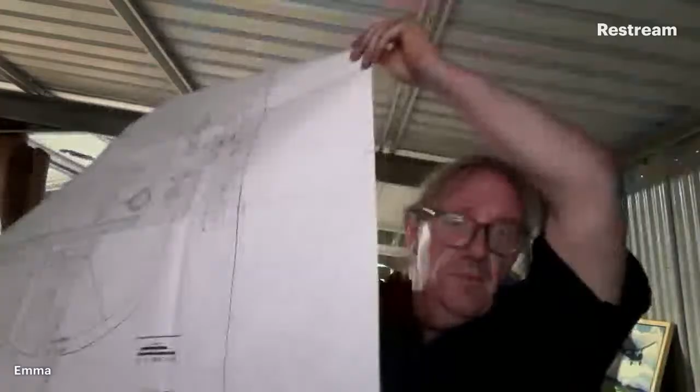Drawing number one. They're huge. I found these in the cupboard and I've been messing around with them. This is the beam engine. I don't know if it says beam engine to you guys because it could be back to front. I've been making hammer handles in the sweaty, hot, stinking temperature today, and I come home and I did a bit of wire wheel work, so that didn't help anything. So yeah, here we are. Anyway, beam engine, one of.

Can we see that? It's mirrored. How do we change? Let's have a look. Video. Video input, mirror camera. Let's unplug that and see how we go. Now we're back the other way, which is strange, it blows me away. Anyway, now it says beam engine. How cool is that?

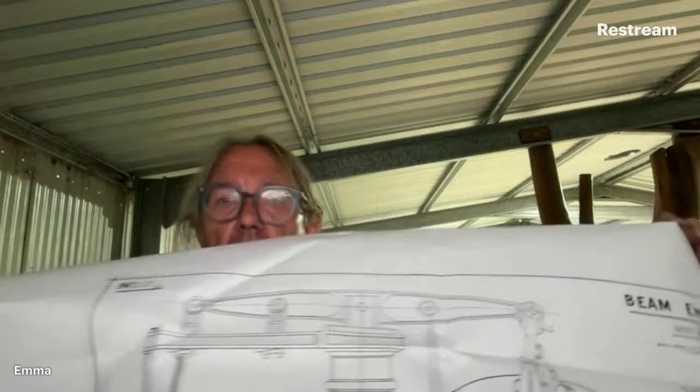Number 12 beam engine, O.B. Bolton, Sydney. O'Burnaby Bolton was an optometrist in Sydney, and he sold a lot of steam engine kits.

Some of them were - this isn't another project, just some background on this - some of them were originals and some were copies of other things, like Westbury's Kitty Hawk, and what else did he sell? Copies of quite a lot of live steam locomotives that were Australianised, I guess, and stationary steam engines that were copies.

But most of his stationary steam engines actually were originals, and I've got castings for quite a few of them. I have the majority of castings for a number 12 beam engine, which is huge, right? The box of castings must weigh 25 kilos. It's 20 inches long, that's full size, to give you some idea. It's got a 14-inch flywheel.

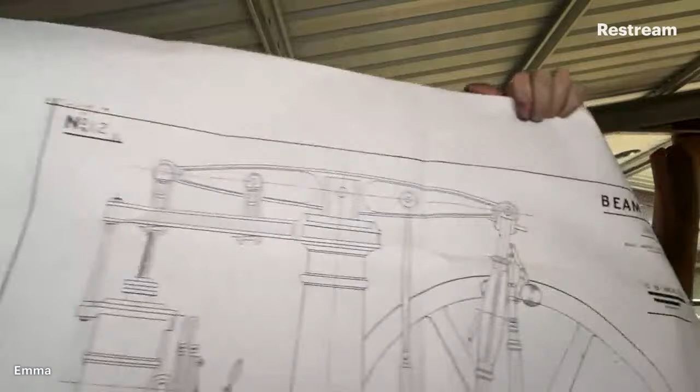So it's a bulky big steam engine, and it's nice. But being a beam engine, I thought, well, I'm going to go ahead and just CAD it up, see what we end up with, see how it looks. It's a bit of a job, there's 4 huge sheets of drawings. That's the general arrangement we're looking at, just for comparison, what have we got?

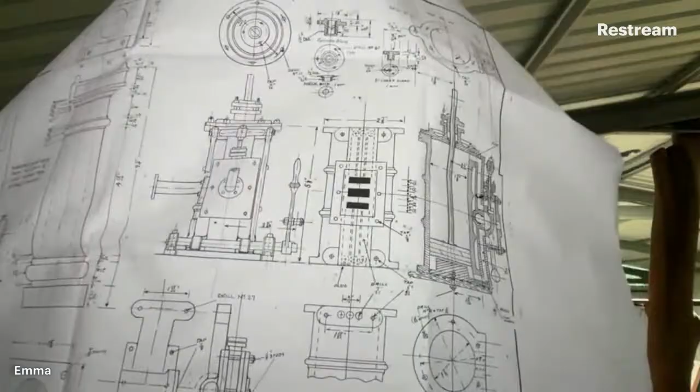Drawing number 2. Number 2's got an end view of the engine. It's got bearings, column in the middle there, and cylinder covers, all that stuff. Better just to look through the drawing from the back and show you. Cylinders, all that stuff. So that's drawing 2.

Obviously they were done over a period of time because they're all noted different and a little bit different style. But this is number 3. It's got the beam and the governor, see that? It's a governor, conrod, flywheel, pump, and valve gear. I'm going to actually fold this one up properly. It's time. There we go.

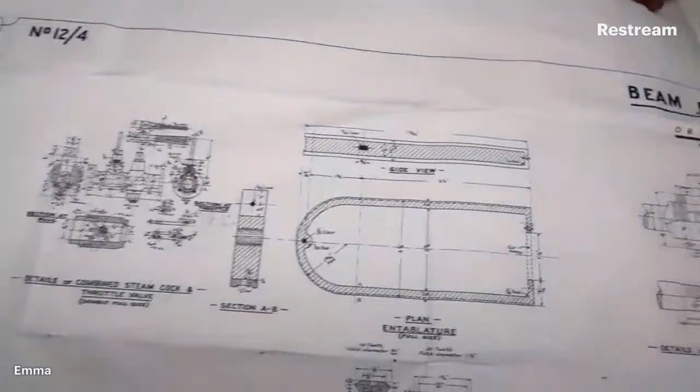And drawing number 4 has some details on it. So it's got the straight line arms and links, and what else? Some governor details and entablature details, regulator or regulator valve details, and big end details, basically, and some governor levers. So, fold this one up too, nicely, probably.

I don't think that's exactly right. Anyway, so it's a nice engine. And I thought, well, I'm going to CAD this up because while I've got the drawings out, we might as well see how it looks. And there's some interesting animation and some very interesting CAD involved in the engine itself, because it has Watt's straight line motion, and it's got basically 4 links that all operate from the flywheel to the piston.

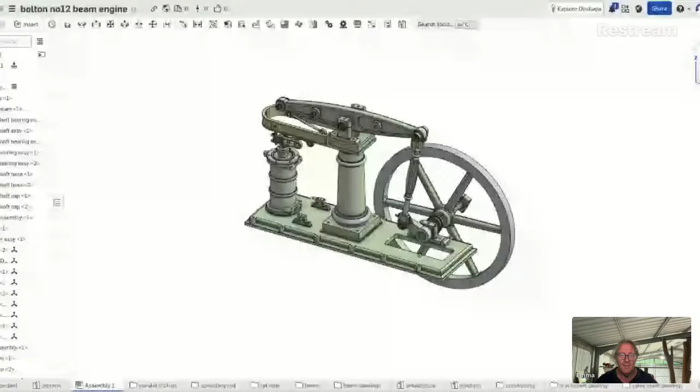So that's Bolton's engine. Let's have a look at it, what I've done here, while we're at it. You're going to get a blue screen here. There we go. So this is Bolton's number 12 beam engine.

It's chunky. And we haven't quite got the straight line motion working yet, so there's some interesting things. This is disconnected, so what we can do is get a little circle of death because I'm not sure how much internet we've got. But we've got that bit working, right? We don't as yet have the straight line motion or the cylinder going up and down, but we have that going. So I've spent a little bit of time on this, and it's sort of a nice engine.

There are other issues with it, as far as actually building the thing. There's things about it that make it complicated. It's a Bolton engine, so castings are available, the ones I haven't got. It's big, you need big machinery to do it. The base is like 20 inches long.

And the fly is 13.78 or something, the drawing says. Beam's about 14 inches long. And the column itself weighs probably 5 or 6 kilos, and the base bed probably the same. The beam's probably a 3 kilo sort of a casting. The fly was probably 4 or 5 kilos. So it's a lump of a thing.

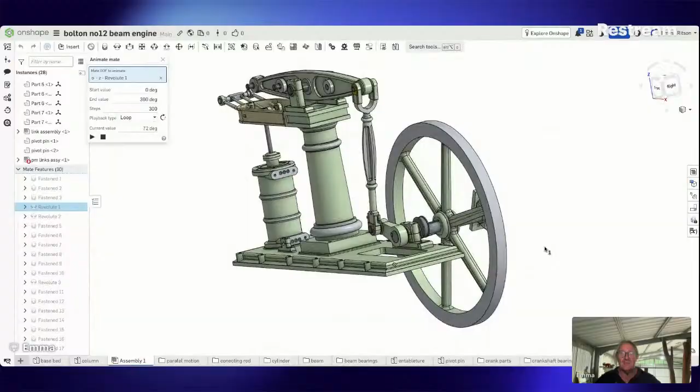But the issue is it's got an outrigger bearing. An outrigger bearing is not connected to anything at the moment. It's not shown on the drawings of where you would connect it. So that's very nice, but it's not self-contained. So you've got to have a base that's at least this sort of dimension.

If we have a look. 6.5 inches, something like that. 6.5 inches deep with a cutout for the flywheel and another piece over here to support this outrigger bearing, which is something like this.

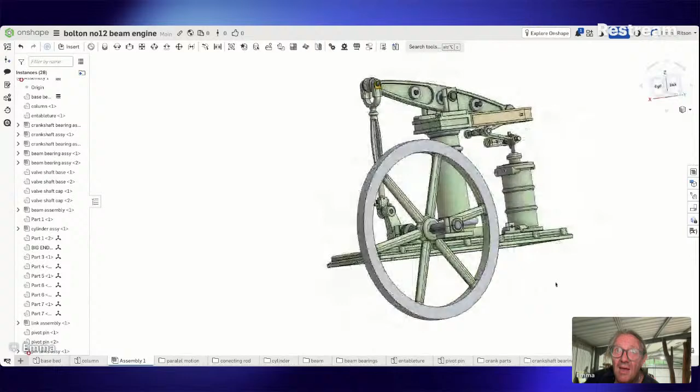So it needs another piece of base here. Now, whether Bolton's ever made a big cast base for it, there's a good chance that they did, because I've seen something similar that's not in their catalogue for the number 7 engine, which also has outrigger bearings, which is a horizontal engine. I've got drawings and most of the patterns. I haven't got castings, but I've got most of the patterns for that.

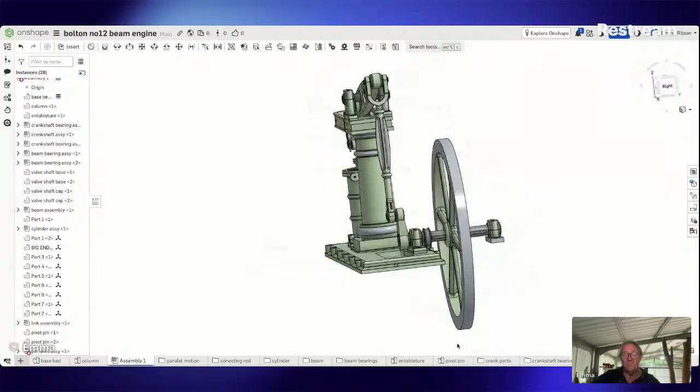So how you would make a base here, like a big huge, either a wooden base, or you laminate something up and put a cutout here for the flywheel, something like that. So make a box, hole in the ground, that's what it needs, yeah. So I think you'd make a decent box here and laminate that up out of timber. Bit of red iron bark or something would be nice if I got the facilities now to do it, if this ever happened. And then cut a groove in here, the shape of the flywheel, quarter of the flywheel.

You don't want a groove like this because then, I don't know why I'm saying this, but you don't want a groove that's the full thickness of the flywheel, because this fills up with oil and dirt and stuff and you can't keep it clean. You've got to take the flywheel out every time you want to clean it. So if you just do a quarter of this and have the flywheel open on one side, and probably steps up the side.

Now this isn't a huge, the prototype is not, gosh, I'm dirty, sorry guys. The prototype is not a huge, big engine, to be honest. Thought it did say how big the prototype is. The prototype is installed at Oakhampton Waterworks near Maitland in New South Wales.

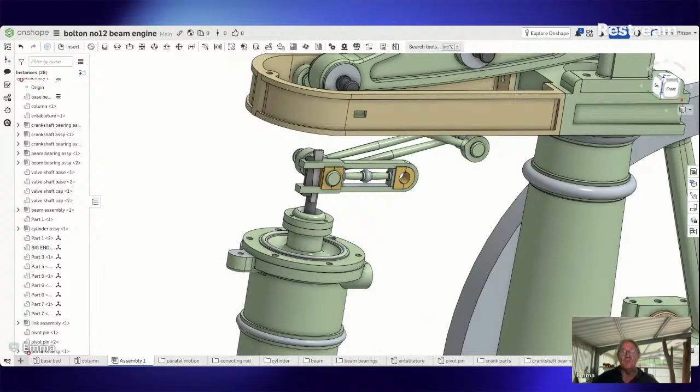Pretty decently designed model, and not that complicated. If you have a look at these bearings, very simple castings, and big end, of course, with proper captive ramp in here, and then a tapered wedge to hold the horseshoe on, and then that holds your 2 halves of your bearing onto the crank.

It's got 12 pretty decent bolts to hold it together, hold it down, and all the valve gear goes in here and is separate to the cylinder, so the steam chest is separate, and bolts on with all the passages in the steam chest. So it's a fairly simple thing in that way to build.

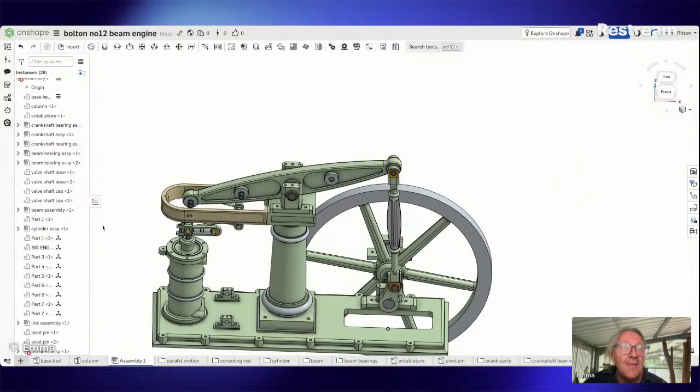But it's got some challenges in the motion. So this here is supposed to be vertical, and this one here, this bush here, is supposed to go on this pin. So there's another one of these goes here, on this bush here and this pin. So there's one on there and there, and one on there and there. Looking at the front of it, we've got the side of it, there's a pin there and a pin there.

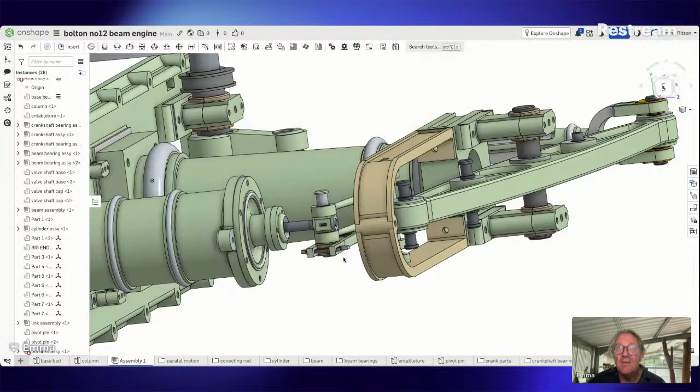It has one of these parallel motion assemblies on each one. One there, one there, one there, and one there. And the four of them go up and down, and rock side to side, but they go up and down vertically as this beam goes up and down. Those four go up and down with the beam.

And then there's an anchor bar there that is actually fastened. It's got some bushes onto the entablature or onto that arm there, and that means it gives you a line through here through the cylinder. So that's the, I think it was patented, straight line mechanism.

So a nice little engine, that's what I've been messing with this week. I think I've had a reasonably productive week, but I've actually done a little bit of CAD work, and that's what it was. Just this pretty little beam engine to actually see how it looks and whether it can be CAD'd up and put it all together.

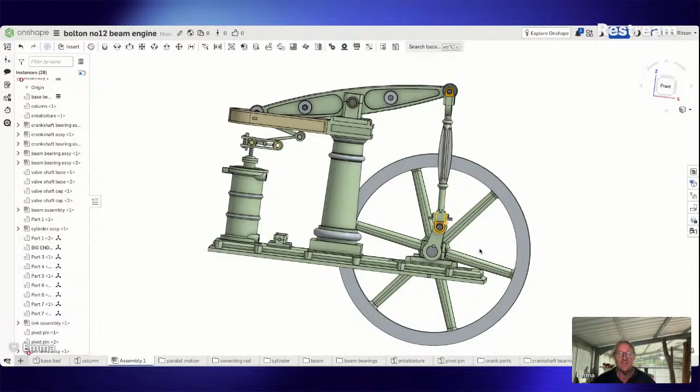This has got prototypical starting gear on it, so it's basically a notch in the eccentric rod. The eccentric rod sits over a lever here. Eccentric goes on here, I think I've put the eccentric on there. Yep. And the eccentric rod comes up here and sits over a lever and works backwards and forwards, and you lift that out to disengage the flywheel for starting, and then you can use another lever to independently move steam into the cylinder at each end to get it going, and then you drop the eccentric in to keep it running smoothly.

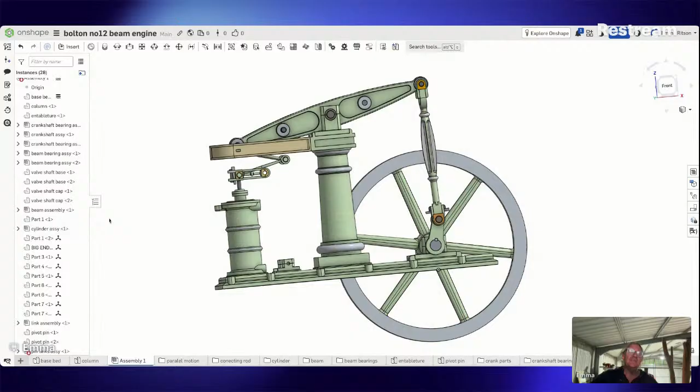It's also got bevel gears and a decent governor, like a really nice flywheel-style flyball governor, and that works on a valve on the cylinder on the steam chest to make basically a proper governed engine. So it'll run pretty slow, I would imagine. Anyway, that might be of interest to someone. We're sort of still playing with it.

Haven't even thought about any of the detail that goes on here. To give you some idea, we click over here on where it says section view. We can section it like that. It's got a hollow column. That gives you some idea of the bits that I've actually got in place now, but there's still a lot of work in it.

And I'll cut it up, and I don't know if I'll go any further with it, but it'd be a very nice engine to build if I had access to some bigger gear.

But I think you're looking, the finished thing is about, let's have a look, let's see where we're at the moment.

We can just do that with our mass properties. As we're standing there, we're looking at most of these parts. Some of these linkages I'm still working on, but most of them have been basically labelled with the correct material, so this isn't far out.

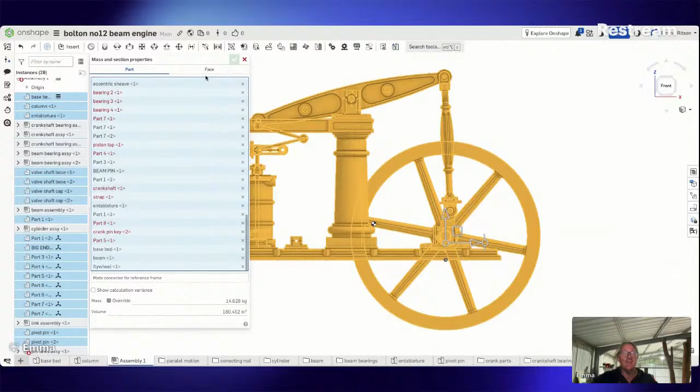There's a list of things here, and 14.628 kilograms. So we're pushing 15 kilos as we are there, and there's no eccentric, no valve gear, I don't think there's any straight line gear in it at the moment. No governor, no nothing, and then a solid, decent base for it, and a ladder and some handrail stanchions and things. You're probably looking somewhere around 20, 25 kilos for the engine.

So it's big. Anyway, that's something we've been messing with. Just because we can, and because I needed to, I felt like having some downtime. And it might have been fun, with Karl's low angle block plane.

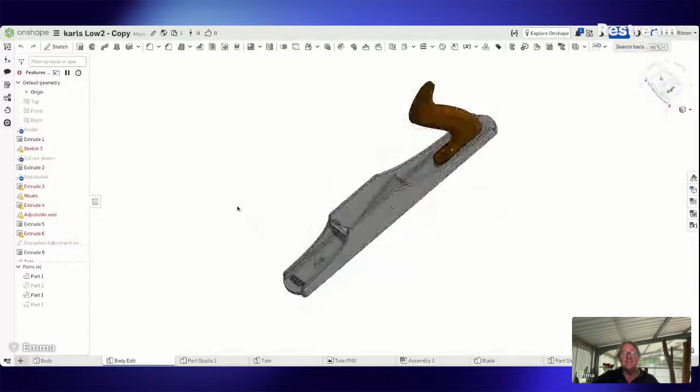If you can hear the printer going in the background, that's what's actually printing downstairs. This is something that I've sort of, a friend at work and I have been playing with. I think potentially this is going to be a very nice tool. It's not anywhere near complete here yet. We haven't got the adjustable mouth in here.

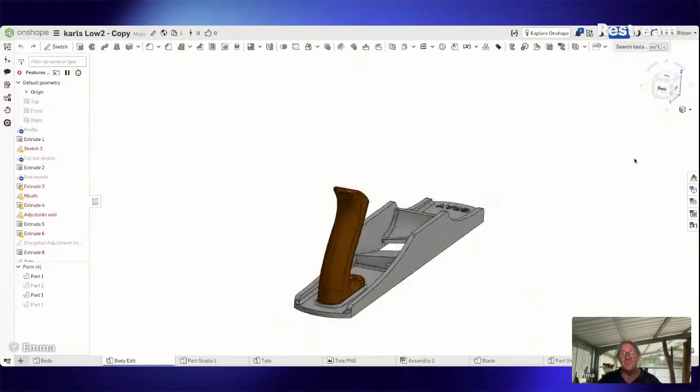There's no real front knob on it, and there's no adjuster in it yet. We haven't actually got enough. This isn't far enough back or anything for an adjuster. And it feels a bit like, proportions probably aren't terrible, actually. We're just looking at that.

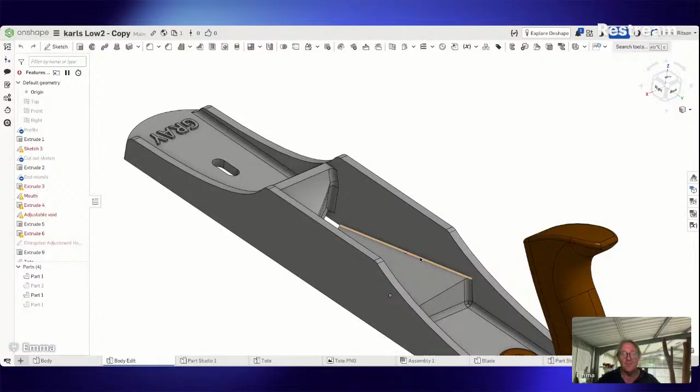But it'll be a bronze casting, and probably there's some fairly interesting sort of shapes, patterns and things in here, because it's a compound angle in here. So it's a skew blade. See, so it's got an angle this way on that line, and it's got an angle this way on that line.

Some very interesting CAD work in here, and I guess that's where our Stanley 140 was heading. But that's 3D printing at the moment, and probably tonight I'll have it printed and put together, and we can have a bit of a look at it tomorrow, as far as I'm not sure if Karl's going to be at work or not, but probably it might be Thursday. Anyway.

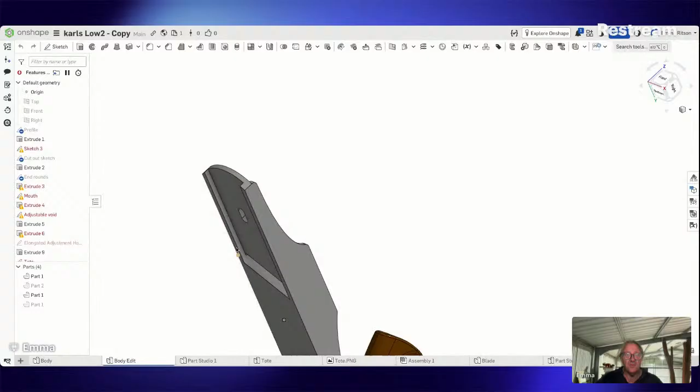It's going to need some sort of a movement system to move or adjust the front, the adjust the mouth. Haven't actually thought that through, and it's having an adjuster in here, which is quite a simple thing, but there's not enough room there in here for it. So that's going to need a little bit of modification or improvement.

It's got a plain blade, and then I think just a slot with a keeper, and with sort of a bit of a fancy bronze cap on the screw, and then just probably just a bolt to screw it down. So that's how that's going to work. And it's about a 2-inch blade, or a fraction more, a fraction less, 50 millimeters or something, to give it a little bit of adjustment.

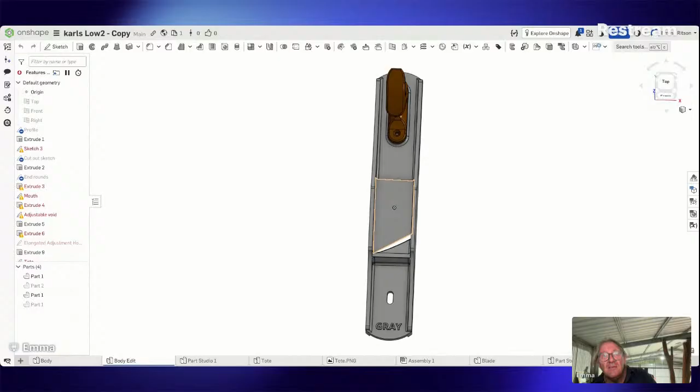And I believe that it probably needs a little bit more work. I'm looking at this here, thinking I don't really like the shape of this here. I'd like to see this here come into the front here and have the front smooth all the way around, with this sort of curved off here and not this little angle gap in here, that shape. I don't like that very much. I think this is a bit boring where this is here, and it's probably all right, but whether it needs an actual bit of weight in here and a curve and a big radius, we're not sure.

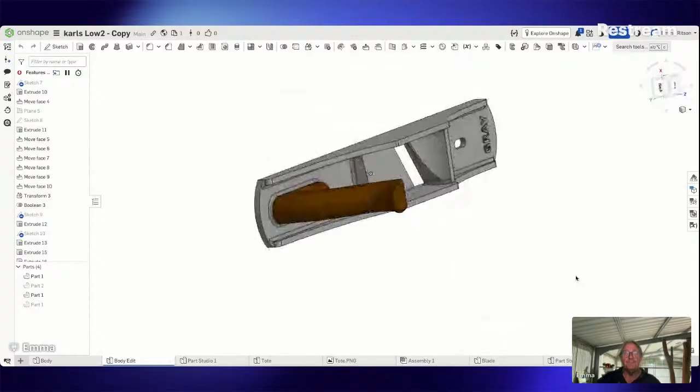We're going to have to do something in the back here for the adjuster, so it means extending this out here. And whether we just go with the plain Stanley style grips like that, which sort of are in keeping with it. But then if you put a Stanley knob on it, it looks a bit crappy. So that's another job that I've been messing with a bit.

This is an actual real job. This is an actual project. And I guess if we get a couple of castings, I'll make one, and Karl's going to supply some bits, and I'll supply the castings and the timber maybe. And he can supply, I think he offered to supply adjusters and blades and stuff.

Probably O1 tool steel, and I've got the heat treat oven and all that stuff. We just got to machine it. It'd be nice to have 3-phase power at some point, but that hasn't happened yet. Anyway, that's another job, if anyone's sort of interested.

Another job that we've just finished is actually translated into an actual real project, and it's getting very close to finished.

Gee, it's hot here. Is this going to load for me? Are we getting audio and we're getting all that stuff? I guess so. To be honest, my internet's a bit crappy this week. Come on, do the thing.

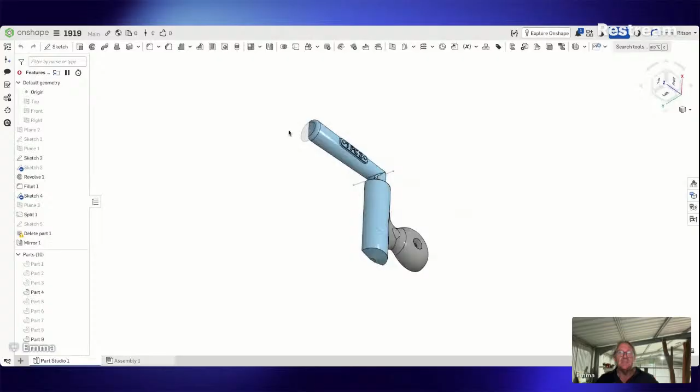So this is, I don't know if you saw this, but this is actual pattern parts for a lever, or basically that's it.

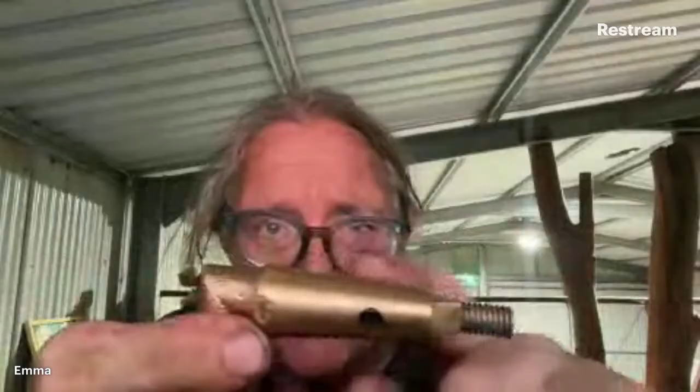Have a look, if we go back to there. So that's it, with the writing on the side. A plate on there, another plate on there with a little 3 on it. This one's been lapped to within an inch of its life, and really I've machined it and got it back to cylindrical again, but there's not enough meat in there, and this hole's just about out of sight in the valve body because it's in too far. So we could plug this and silver solder it and remachine it and put it in and make another spacer washer to go on it, and it might be all right.

Anyway, the pattern's finished. I probably did show that last week. But that's a job for the foundry.

What else am I messing with?

This all seems a bit procrastination-y, it's stuff you do when you really can't be bothered going and actually making stuff out of metal, which feels like a cop-out. And I've spent a lot of the last few months on anything I've done for myself or for my projects. That's where I've been with this.

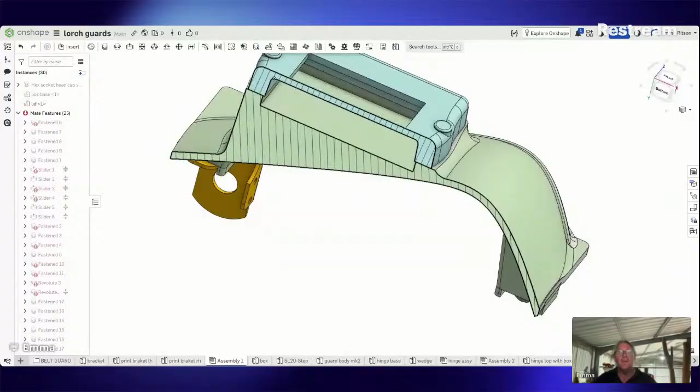You're not seeing my CAD. Sorry guys, that's a bit crap. Thanks for that. There we go. Sorry. There we go, we'll start again.

Here's the cover for the... sorry guys, this is a cover I've been working on for the guard on the Lorch. All right, this is the CAD work for the guard, and it's an old drawing.

And this is the new cover, which is going to have the tacho in here somehow, probably cast in aluminium and then filled and painted. And you've got the head screws here to hold it in place.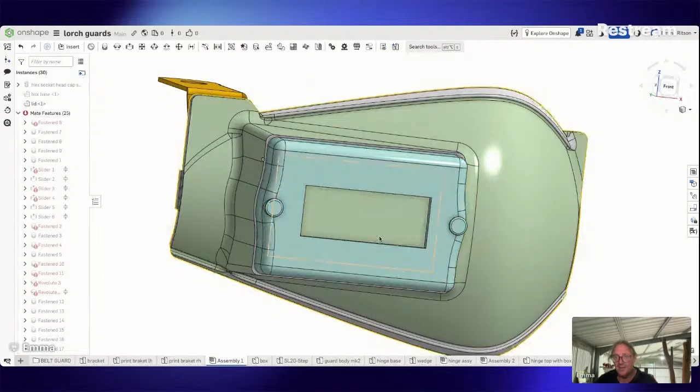So this isn't really big enough here. It doesn't seem to line up nicely. We might have to have a bit of a play with that. Now I've actually put it in place - I've only just dropped this in the drawing to see how it works. And I believe that originally this cover, before I modified it, was stand out here.

That was another option, and it's got a taper on it. So shortening it up means that this doesn't quite match up. So that's another thing that I've been sort of messing with. And I think that looks good - it sticks out sort of that far.

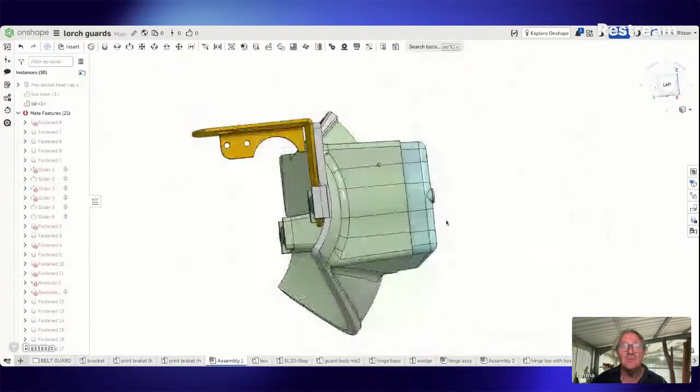It looks apart. There's room in there for the tacho we're putting on the top here, so you can't see the 7-segment display, just the numbers.

Some jobs take just that little bit longer. This drawing was started - let's have a look at the versions here. Workspace property, where we look for this. No. I think if we go back here. Versions in history - so we started on 24th of December 2023.

This drawing was started, so we've done all right with that - 6:04 p.m. on December, Christmas Eve 2023. It looks like I got in and started drawing this up.

I've been working on it. If we drop that down, there's a bit of a list of changes. So looking at this - January. Looks like the 12th I actually did a fair bit of work on it. January the 11th I did some. January the 9th.

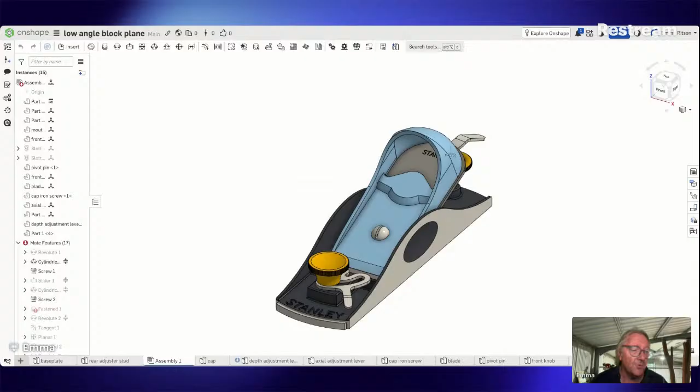Will that be cast? I guess we're talking about the cover for cast in aluminium, I think. I'll print it and then cast it, and it'll be a nice job then. But I'll make a temporary one that looks like it's going to work and fit everything in plastic, and then when we get it working, I'll cast one and machine it to match and screw that on, and I think that'll keep the water out.

I think it probably needs some sort of lens on the front of it. I haven't thought that far through yet.

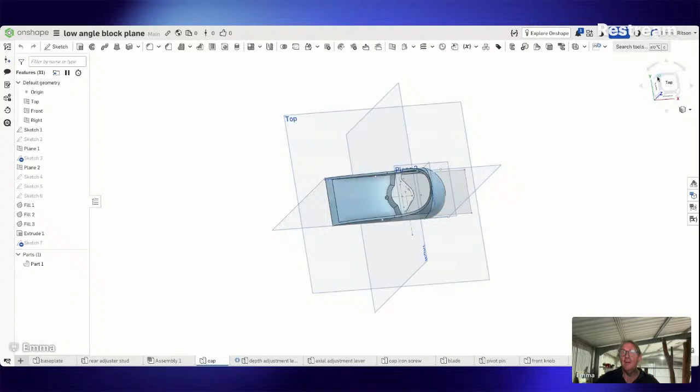Now, this is the hand plane that's close to being finished. We were working here on this crazy cap iron before. If we have a look here - cap. Come on, wake up. So this is what we ended up with here. We'll do a little bit on this. So here in the center...

There's a, we'll have a look at it. We'll get some light, probably. Is that going to be any good at all? No, not really, not helpful, because we're sitting here in the dark.

We'll go back to me again. And hopefully I won't forget to go back to... there we go. That's not real good there. Sorry guys, why have I got light rays everywhere?

Don't know, anyway, this is the part. It's got a keyhole here in the middle, right? And it's got a bushing with a little cam piece that flicks backwards and forwards to lock it in place. And it's got a textured finish on here. It's got a patent number on it. I don't know if we'll go to that sort of trouble. But it's not a complicated thing, and it's close to being finished.

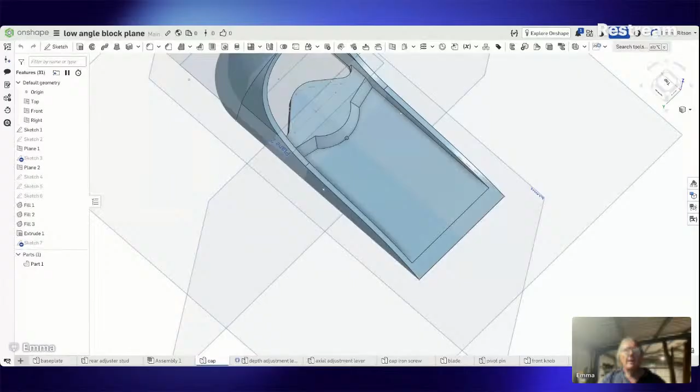So we've got this keyhole here, and we've got a shape - see, this hasn't got any of this shape here, so we could put that shape in. It's probably not going to be the first operation. Put that in the bottom here. I think we're going to put a keyhole in here first. Now looking at it, and I did bring a ruler up with me. We were working in metric on this one.

So what have we got? About 23 mil to the centre of the hole. And the hole needs to be big enough for the screw to go through, so we're looking at about 10 mil.

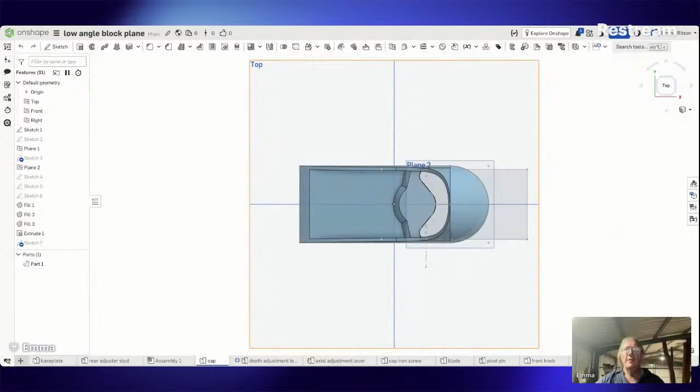So easy enough, let's put a sketch. We'll put it straight on the top plane, and circle. Got that yellow dotted line there, if you can see that in the orange dot, which means it's lined up with the origin point.

We can call this 10 mil. Let's call it, it is only 10 mil, we'll just pour 10 mil, like so. And we'll put a measurement on it, so if we dimension that from there to the front, like that, it's 22 mil.

It's done. It's got a keyhole slot that's about, what have we got, 7 mil. And it's about centre to centre, let's call it 9 mil centre to centre.

So if we put a line, we press Q for a construction line. Q, not 1, that automatically highlights our construction line there. We can put a line back here, and we'll call that 9 millimeters long. Press escape.

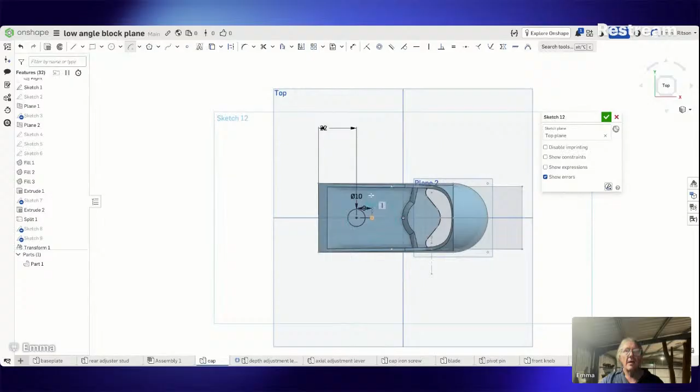And we can put another circle here. Actually, we're not going to put a circle, we're going to save a couple of points and put a center point arc there, around like that. And we're going to call that as a radius on an arc rather than a circle, so we're going to have to call that 3.5 millimeters.

And that gives us sort of an idea how this works. If we draw a line from there through to there, press escape, and we can probably just mirror that, select the mirror line, and that one. Entities to be mirrored - I think we mirrored that one twice, so we'll start again with that. There we go.

And then select the scissors and trim that there and there. Like so. Cut this bit out, and this bit, keyhole shape.

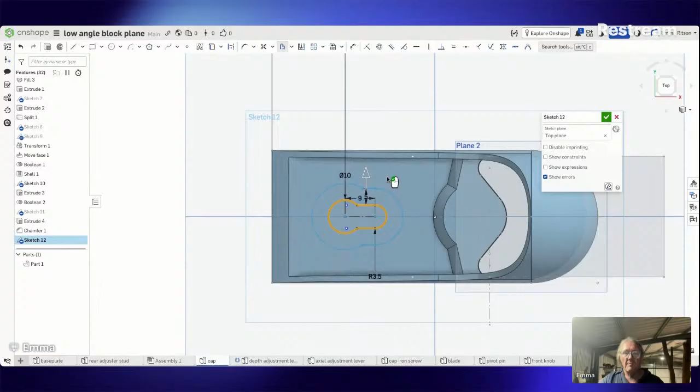The tip drops down slightly. Maybe that's how it is. You're probably right, it's probably more that than the cutout. So there's our cutout.

Extrude that from there through to there. I haven't got a clue how tall that is. Comes up a little bit. Let's see how 3mm looks.

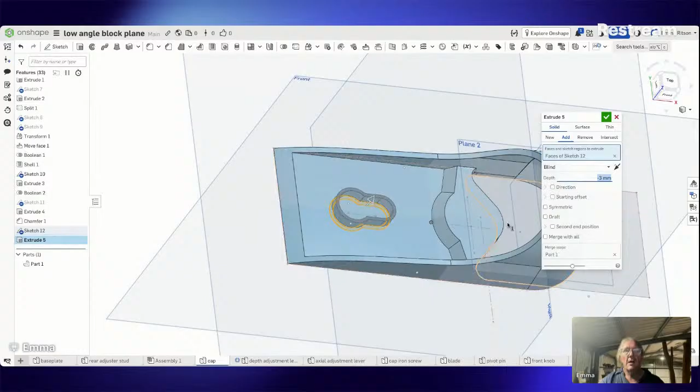Three's not enough. Is it? 3 is enough. 2.5 is probably enough. Let's call it 2.5.

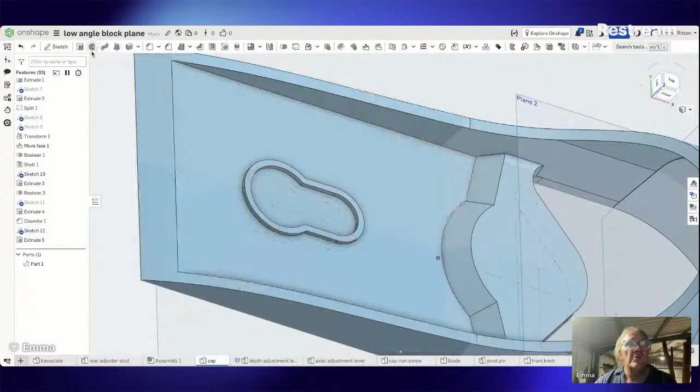That's that. If we highlight this sketch again, because it's automatically shut - I think you can change that in the settings, I've never ever done that because there's pluses and minuses of why you should do that. We can do another extrusion on that sketch, so basically on the inner part there. And I'll go for reverse so it goes the right way. And there's our keyhole in place. Job's done.

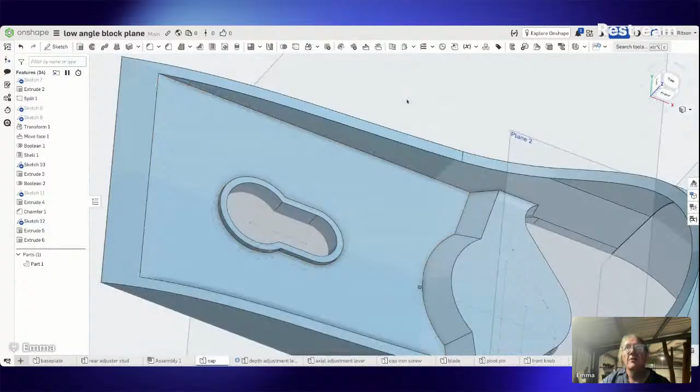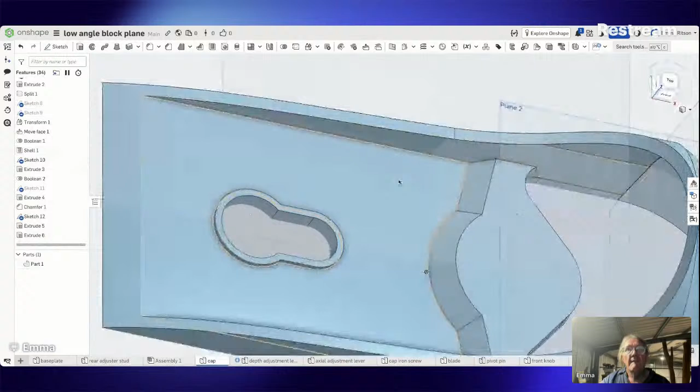Sketch on this plane here, which is that face there. See this - so that face, we want to put a diamond pattern on there.

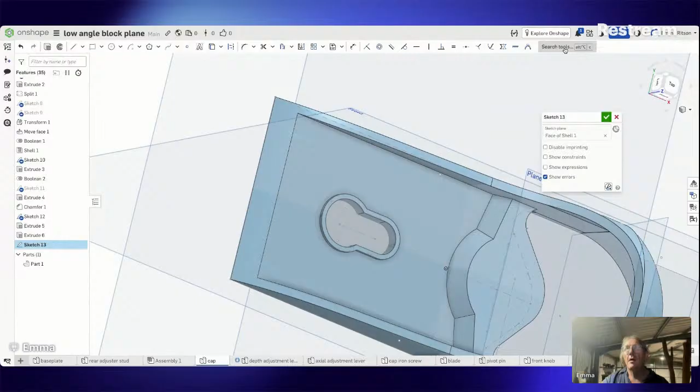Now, ways to do that. First thing to see is the search tools, and we can search for pattern. No. I know that there's a tool for doing this, let's have a look here.

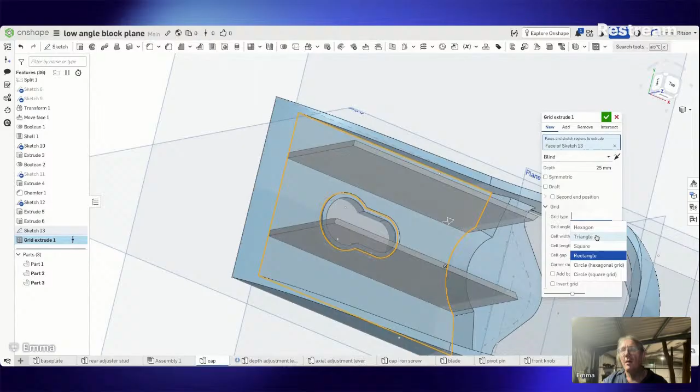Rather than put a sketch on here, let's have a look here under this. Grid extrude is what we're looking for. Grid. Nope. Have a look here. A knurl pattern, maybe.

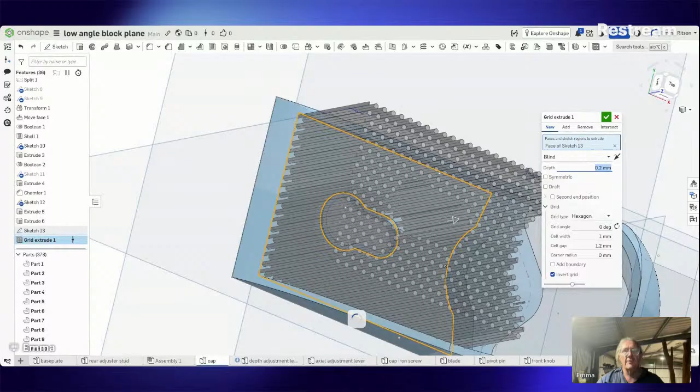Diamond knurl is sort of what we want, I guess. It's trying - see how it handles this. It's using some actual processing power on the out on the grid somewhere. I mean, that doesn't look terrible, but it's not really what we want. That's getting a lot closer.

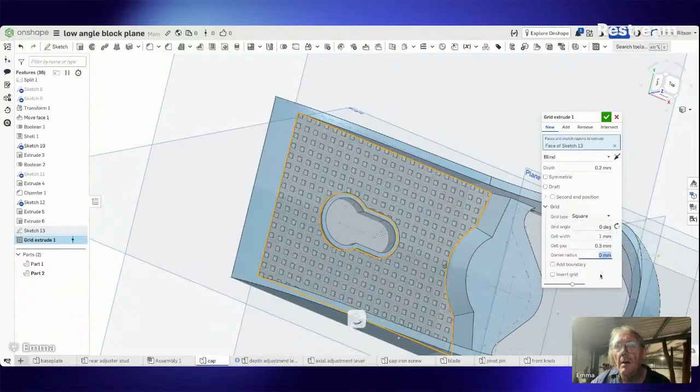Now we're starting to talk to it. We'll see how it goes. Grid angle 45 degrees, Peter says. See, Peter's learning, yeah.

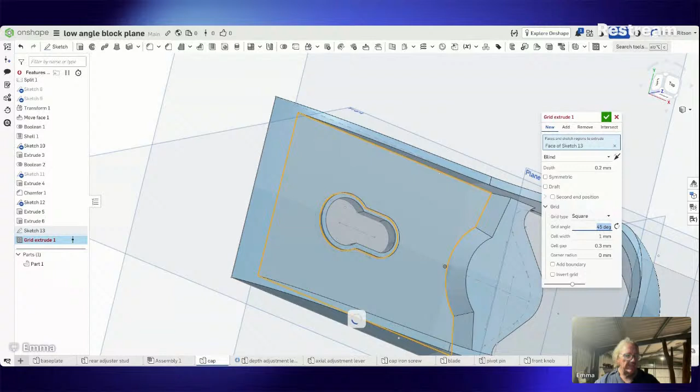We'll just wait for it to sort itself out, because I'm not sure how good my internet is at the moment. Bit sketchy, actually. I think I used all my bandwidth already, and I've still got about 12 days before it resets, and I can only change my plan. At the moment it's my mobile data we're working on. So that looks all right.

Now, measurements here. It's actually inverted. Let's invert that and see what it ends up with.

It's taken a minute. I'm not sure how to make them points. Yeah, I'm not sure they are points. There is what we're looking for. Not that. Not that.

Well, this would be very nice if this tool had a draft angle on it, but it doesn't, and I don't think I'm going to go to the trouble of putting draft angle on it. We'll just wait for it to process itself.

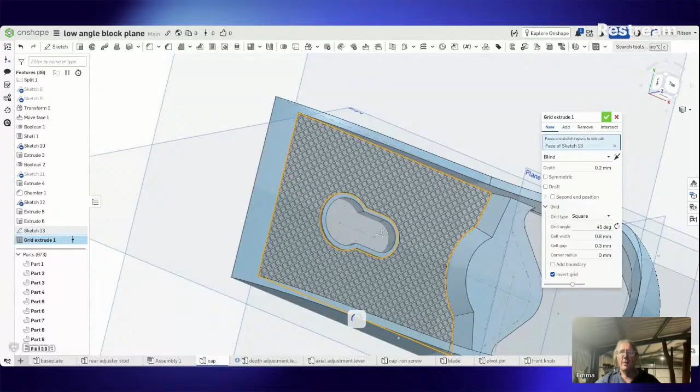Come on. Hopefully that's done that. If I refresh this page.

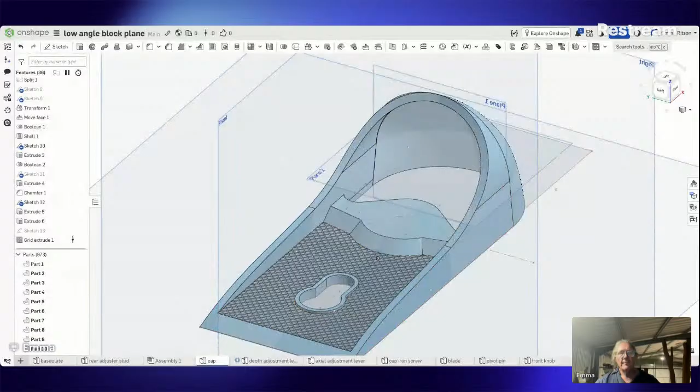No, we've got an internet problem, I think. Let's refresh the page and see what we end up with. Oh, thank you, Peter. That's great.

Come on. Come on. If my internet's going to be a poopy head, maybe we need to do something else.

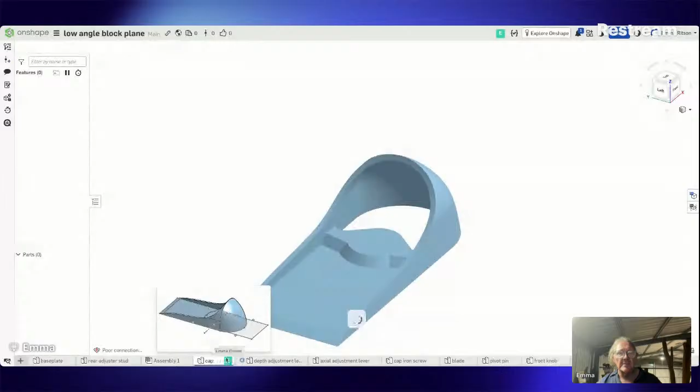Editing that. You probably did. I think I've got a row of emojis. I think that's all I got. And I'm sorry I misinterpreted those or I didn't look at them. I assumed that's probably what they were.

Let's go back to... I got a message. All right. Loading workplace.

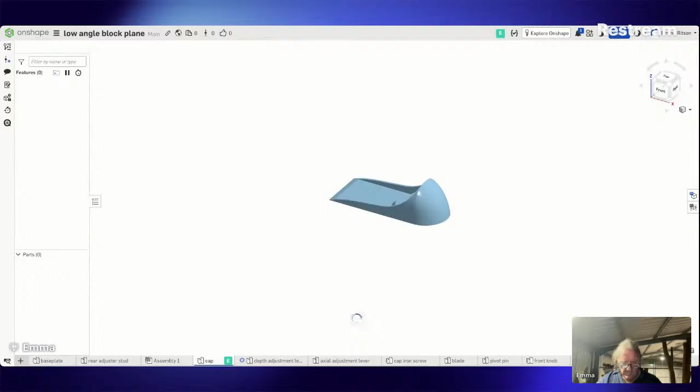Let's see if it does it. It might not. There we go. It's done it.

That's not bad, actually. For the amount of effort we put into it, that's not terrible. I'm pretty happy with that. Good stuff. Thanks, Peter.

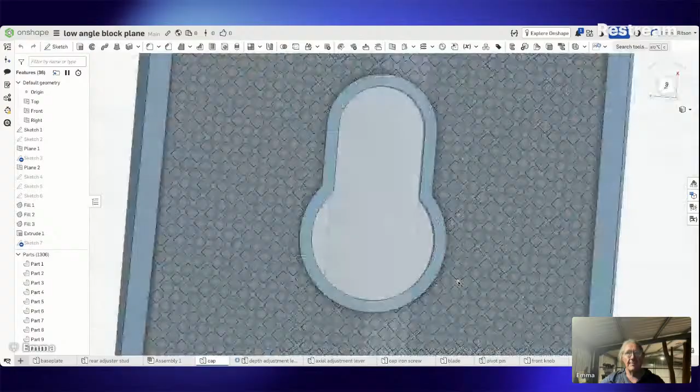So that's that. And I think we've sort of got that pretty good. It's not bad. It looks all right. It's not as good as Chirpy does with all these fancy hand tools, but it's all right.

So here on the center, there's a hole. It looks like, I'm guessing, about 3 millimeters. So we could just put a 3 millimeter hole in there. Put a sketch right on there, a circle right on the center.

There we go, sketch planes there. Face of extrude 4, and then the center point there. 3mm circle.

I think my internet's a bit ordinary here. Sorry, guys. It's going to just chase its tail, so we might give that a miss. But we've made a little bit of progress, and we've had to talk about stuff.

There we go. There's a 3mm circle. We've still got the construction line there because we still had that. Then we can press that, or press Q, and that changes it back, and we can extrude it.

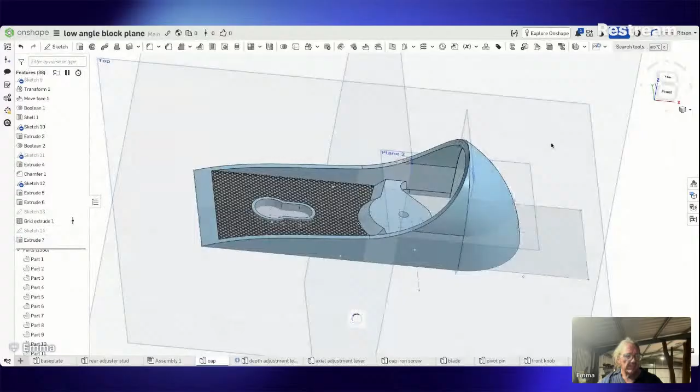So we've got a hole in there. That's done. We haven't put the patent number around that hole. We're probably not going to, to be honest.

This has got a lot more draft in the corners here. I wonder if we can do that. If we have a look here, we've got this feature here that's... loft, is that right? No, this one, draft, body draft, I think is what we need. Body draft these faces.

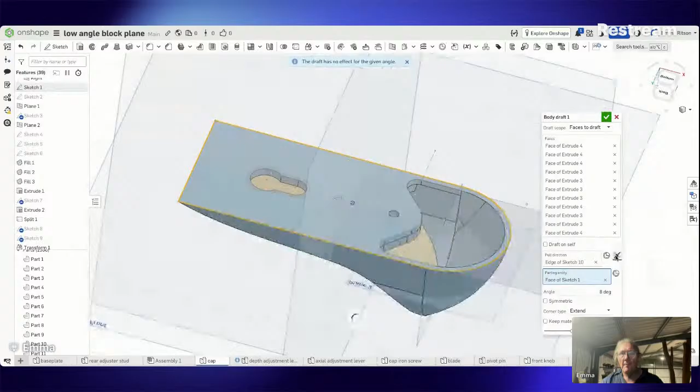Pull direction. It's going to be that way. Now, I'm not talking, so that's probably why you're not hearing anything.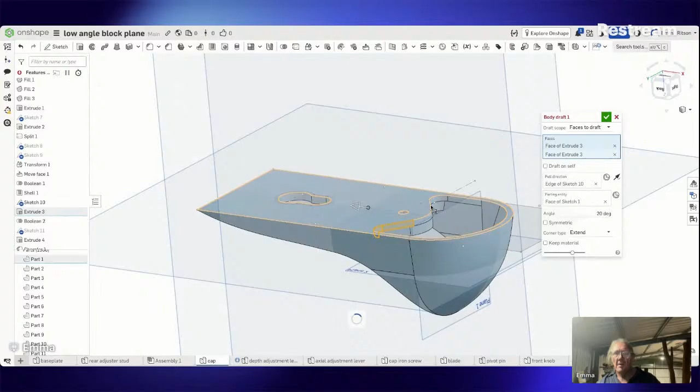Let's close some of these. Just do the top ones for a start. There we go.

Let's see if we can get a little bit of draft on this angle here. Is it going to do that?

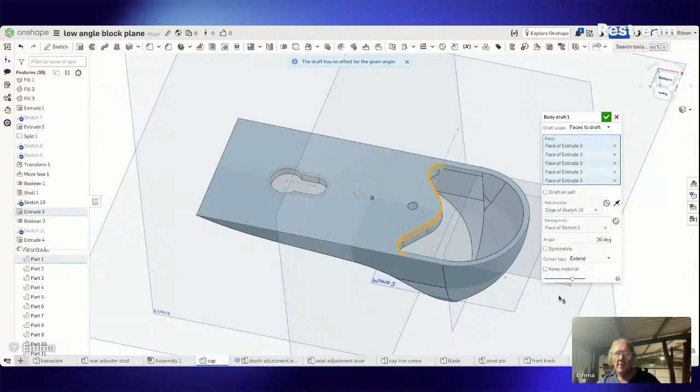But it's not. Anyway, it's worth a try. Close enough.

What we have here is another feature that looks like this, but it goes around the back. So we'll go to the top here, and it's in line pretty well, I think, with this circle here.

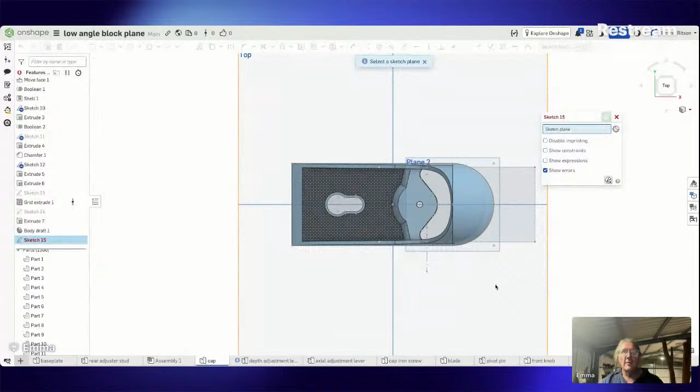So if we put a sketch on our top plane and we put a center point arc from that hole, from that there, something like that. Can you see that? Probably not.

Probably 15 millimeters. Radius.

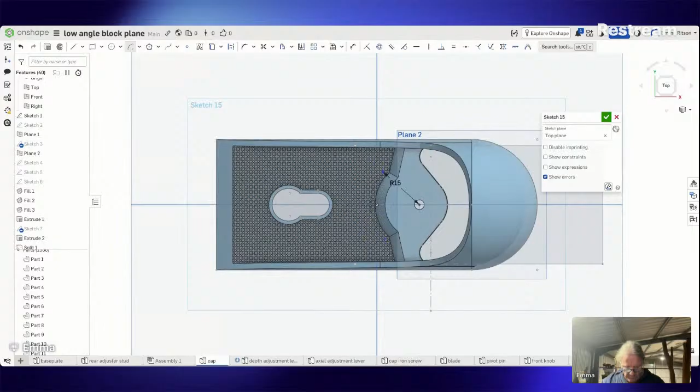And then we've got a radius around there, and you can see that. Probably if I light it up, you can see that.

And then we need to use, if we use this project curve and use this one, what we need is a line, something like this.

What we're going to do, Control Z to get rid of that. Undoing a change. This is getting a bit slow.

Hey, James. Getting slow.

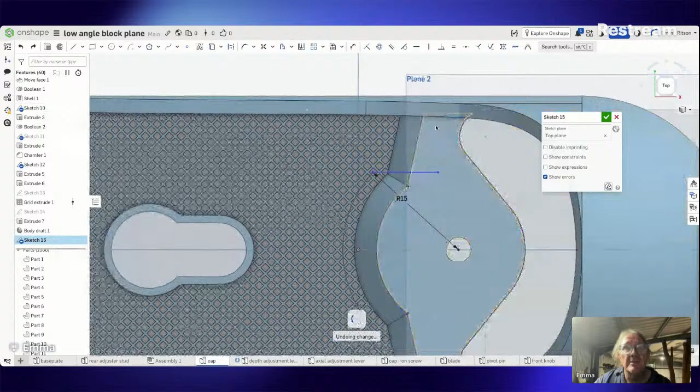I don't think we've got what it takes to do this with this and have it live streamed. It's decided it doesn't want to. So I might call it a night and get it finished, I think. I don't know.

What I want to do is have a clear and concise idea of what I want to do with this.

If we select that and that, now we've got all these parts here. Why is that so? It's because all these are separate.

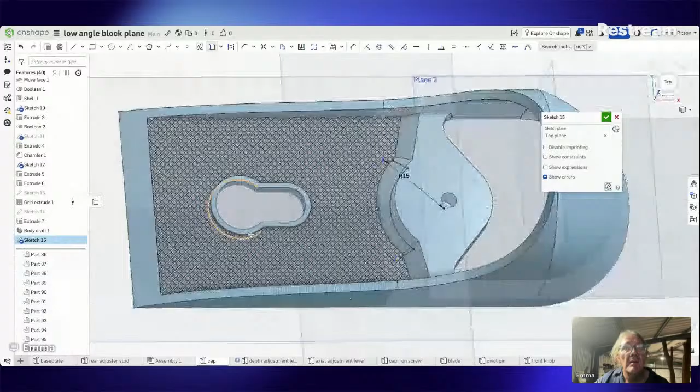Let's close that and fix this. That's why it's taken so long, because it's struggling with that.

Let's do a union. Union, tools, all one piece. Part 1015. That's why we're having trouble with it.

Well, let's let that work for a minute, and then it should be back to normal. It's struggling a bit with 1,000 parts.

And it looks like that's sort of what we've got there. If we scroll down through this, 1,306 parts. A minute, but it should put it all together nicely, and then we've only got one part again.

That should save us a lot of energy in the cloud. So we'll just wait for that to happen. But that's why we're having trouble with it. It's going to be something slowing it down all of a sudden.

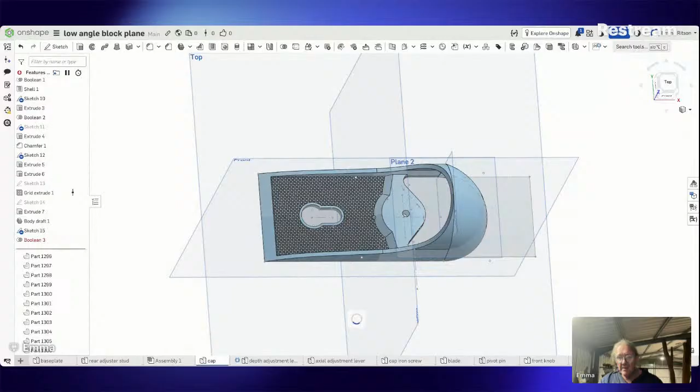Anyway, wonder what James is up to. How's the moving going and all that stuff? You're all fixed. Wonder what the weather's like where you are, Peter. It must be pretty warm. It's warm enough here. How's the tube plate going, Mark? It's all sorted, is it? Come on, do your thing.

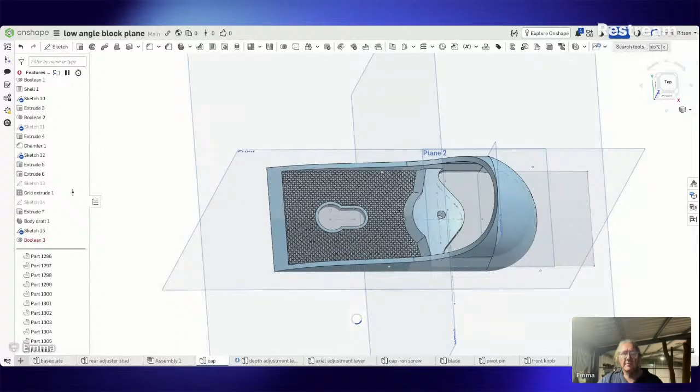You could do this, guys. Come on, the cloud's got what it takes. Maybe.

Anyway, talk amongst yourselves. James says it's cold. It's stinking hot here. Supposed to get a change tomorrow, which would be nice, or even rain tonight. But we'll see how that goes. 33 degrees, that's probably colder than here, to be honest. We haven't got 70% humidity. It's dry here, I guess, hot and dry today. It hasn't really been humid, it hasn't been overcast, it's just been hot. I reckon it was probably 34 or something and hot here today.

It says that Boolean 3 did not regenerate properly, cannot resolve entities. So we've got a problem there. Let's have a look at this grid.

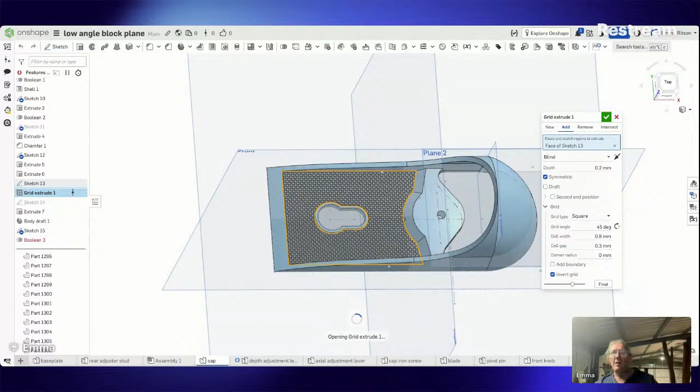I'm going to start to load this again and see how it goes.

Tropical flooding, tornadoes, hot, humid, 21 degrees F, snow. Excellent, that's everything, that pretty well covers it. Not totally missing very much there, James. You didn't say anything about hail, and you didn't say anything about flying fish. You didn't say anything about electrical storms. You didn't say anything about hail. And you didn't say anything about bushfires. I take it that's all good.

I think I've screwed this up. For some reason, the two pieces don't intersect. And they should automatically have connected as one, and it hasn't. So as soon as we resolve that, we'll be back in business.

But I might just let it work for a bit and close this and say, hey, look, we'll come back to it next week. It's getting fairly close to being finished. There's just that detail there with the little slider, and we've got it. But...